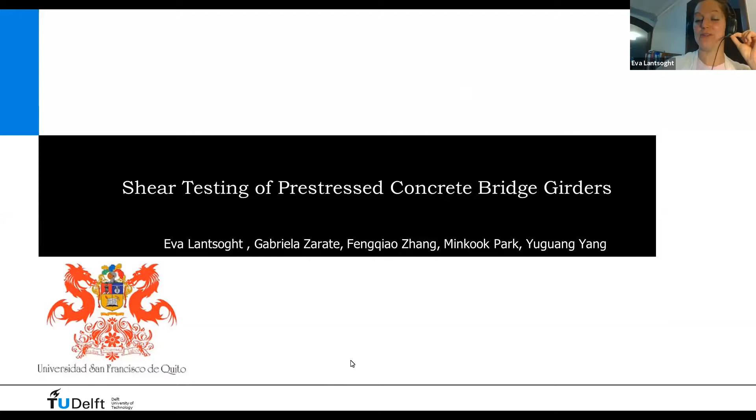Here's an outline of my presentation for today. I'll first give an introduction on this testing and the need for it. Then I'll give you some of the results of the experiments and recommendations for practice, and finally a summary and conclusions.

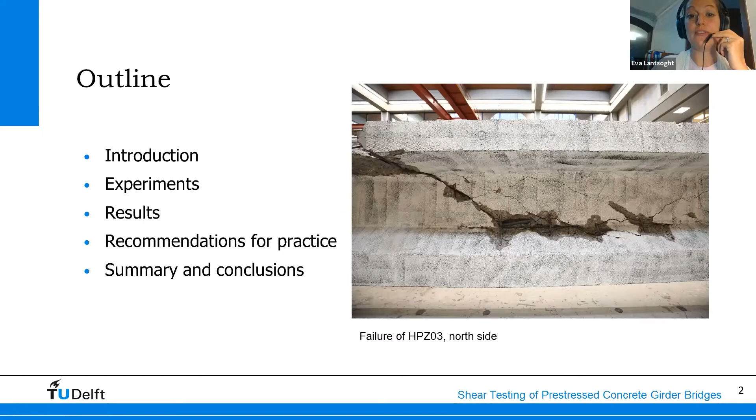The reason we are interested in testing these types of girders is that we are working on the assessment of pre-stressed concrete girder bridges. There are about 70 pre-stressed concrete girder bridges in the Netherlands. These are bridges that have thin slabs cast in between the girders, and the whole system is kept together with transverse pre-stressing. We call this a slab-between-girder bridge.

Most commonly it's the slab-on-girder bridge, where you have the girders and then the deck slab on top. This structural system is a slab between the top flanges of the girders. We also have a number of diaphragm beams that also make the system work together.

In the past, we focused assessment on the capacity of the slabs, because these are very thin slabs, and according to the first evaluations, we found that their punching capacity was insufficient. Previous research has shown that in these cases, compressive membrane action causes the capacity to be much larger than what we would find from the code equations, and that this mechanism does not break down under fatigue testing. So we could conclude after a lot of testing that the slabs are not the governing members.

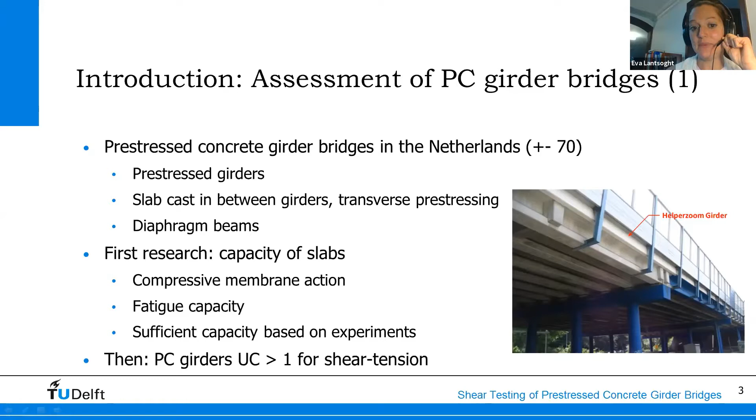What is governing for assessment now are the pre-stressed concrete girders, which have a unity check larger than 1 for shear tension, for the failure mode of shear tension. The unity check in the Netherlands is used instead of a rating factor. A unity check is load effects over capacity, so if it's larger than 1, it does not fulfill the code requirements.

Here you see one of these slab-between-girder bridges under construction in 1965.

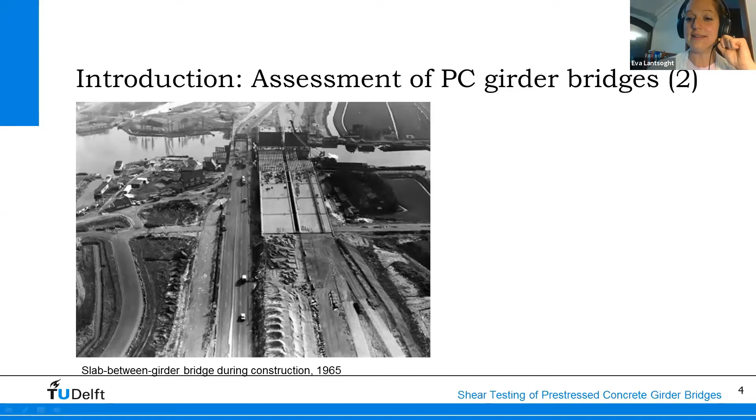I mentioned that in Delft we've done a fair amount of research on the capacity of the decks. Here you see the test setup that was used to test the punching capacity of the decks. That was the PhD research of Sana Amir. You have the reference here on the bottom.

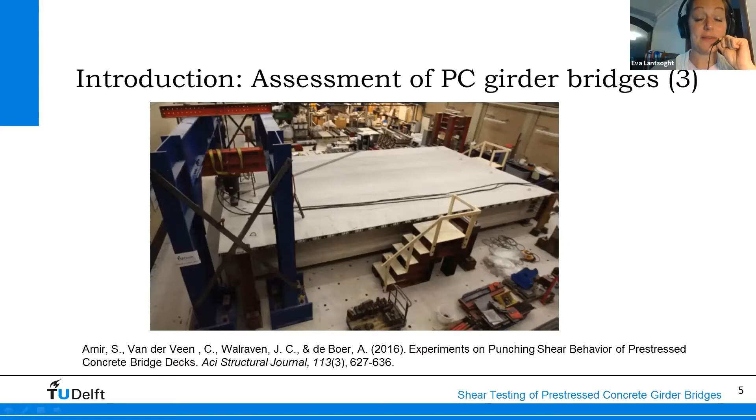As I said, now upon assessment, we find that it is the pre-stressed girders that are governing for shear tension. So let me introduce you to the specimens that we tested. These specimens are taken from a demolished slab-between-girder bridge, the Helperzoom bridge. This bridge had to be demolished because of the redesign of the perimeter around the city of Groningen.

Since these are actual bridge girders, they have all the details that real girders have, which not all typical laboratory specimens have, such as the parabolic tendon profile, with some of the tendons even anchored in the top flange. All the way at the end here, we have the anchor part, and then a part where the width of the cross-section tapers towards where we start to have the thin web.

We tested the full girders, but they were sawn in the field in half so that we would be able to handle them in the lab. The actual length of the girders in the field is about 25 meters. They were sawn in half, so we ended up with specimens between 10.51 and 12.88 meters in length. The overall cross-sectional height of the girder is 1.11 meters.

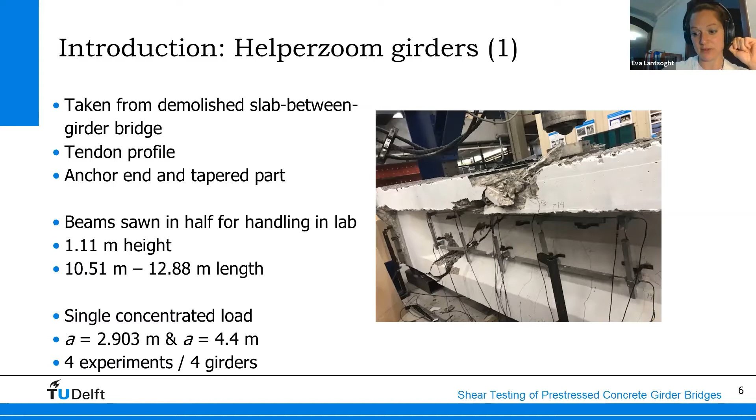We tested 4 of these specimens at two different positions of the concentrated load: at 2.9 meters from the support and at 4.4 meters from the support. So that's 4 experiments on 4 different girders. Here you can see the 4 girders that were taken from the bridge.

This is a cross section of the slab-between-girder bridge. You see how the slab is indeed cast between the top flanges of the girder. And here you see the tendon profile.

As I mentioned, this is a special detail: tendons 1, 2, and 3 are anchored in the top flange, so that's quite a special tendon layout. You see here all the other tendons and their position. You also see that there is very low stirrup reinforcement, a diameter of 10 millimeters at 400 millimeters on center.

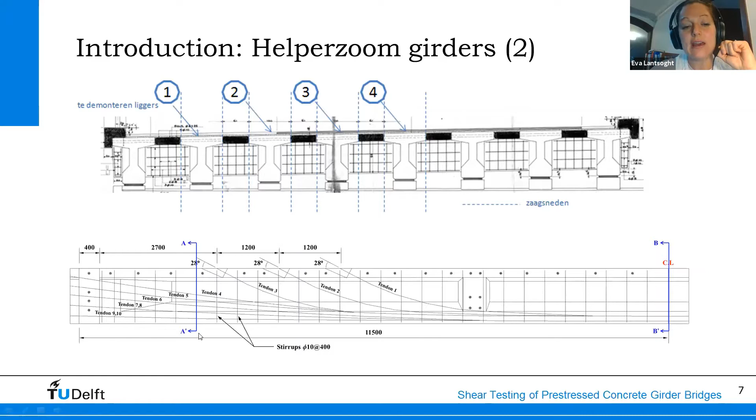Let's have a look at 2 of the cross sections, AA closer to the support and BB at the center line. At BB, as expected already from the previous drawing, we have all the tendons in the bottom flange. Whereas in AA, we have the position of the tendons here based on the tendon profile.

Now, the goal of this research was to look at the shear tension capacity of these girders, and really to evaluate whether shear tension is the governing failure mode in these girders, and to use these experiments to compare to nonlinear finite element analyses.

Especially nonlinear models developed with the Dutch guidelines for assessment using nonlinear finite element models. We have in the Netherlands a guideline for using nonlinear models, but these have been developed for slabs, reinforced concrete beams, as well as pre-stressed concrete girders. Of course, these special girders present a case that has not been used for validation yet.

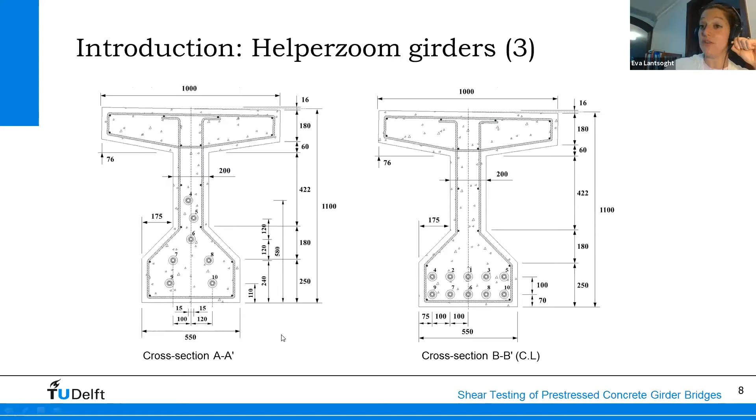And if I go back one slide, you can see the shape of the stirrup follows the shape of the cross section. That's not allowed nowadays anymore, because we think that under loading, the angle of the stirrup will try to open, and that this part is going to fall off. So we also wanted to evaluate if that's really a failure mode that happens, or if these non-code-compliant stirrups still function in carrying load.

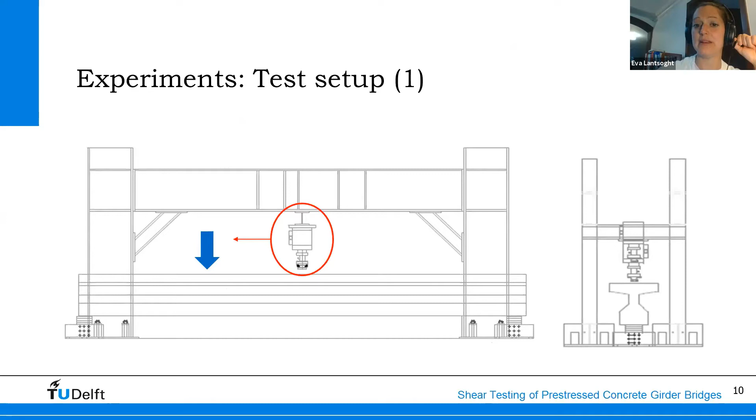So here is our test setup. What you can see is the girder and the frame and the jack that we used, side view and front view. And this is a photograph of it.

So we've used a large frame, the frame that we use in the Stevin II laboratory for all large-scale testing, with the 2000 kilonewton jack, and for the last experiment we used our 5000 kilonewton jack.

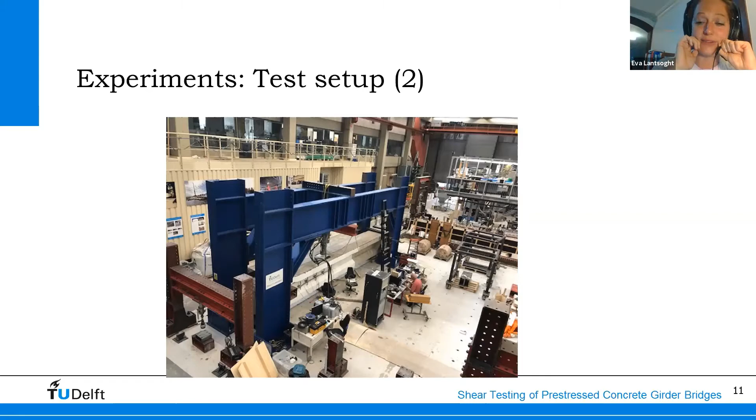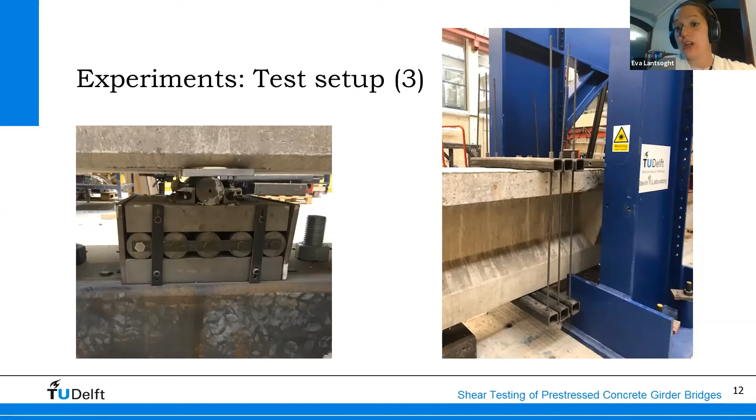Some details of the test support. Here you see the detail of the support, and since the specimens were sawn, we wanted to avoid the pre-stressing tendons pulling in and causing a splitting failure on the sawn edge. So we provided vertical pre-stressing, using Dywidag pre-stressing bars, to apply an axial load on the cross section to avoid that failure on that side.

In terms of instrumentation, we applied a regular set of LVDT measurements to find our strains in a grid on the side. We applied laser distance finders to find the deflections. We used acoustic emission sensors to study the wave-based properties. We also applied smart aggregates, casting them into the specimen. And we took photographs to do an analysis using digital image correlation.

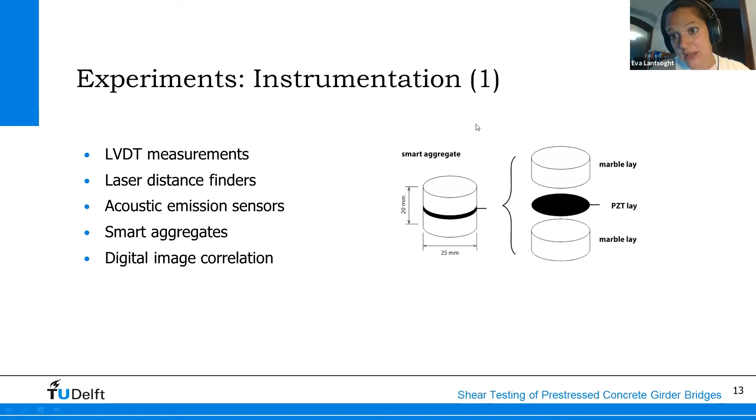So here you see an example of a smart aggregate. It's essentially a piezoelectric layer between two marble layers.

Here is the sensor plan for one of the experiments. It varied a little bit among the experiments, but this gives you an idea. We have the grid of LVDTs to find the strains and deformations, the positions of the acoustic emission measurements, 15 in total, and the laser distance finders under the position of the load. On the other side of the specimen, not shown here, we have the speckle pattern, and we take photographs to do the digital image correlation.

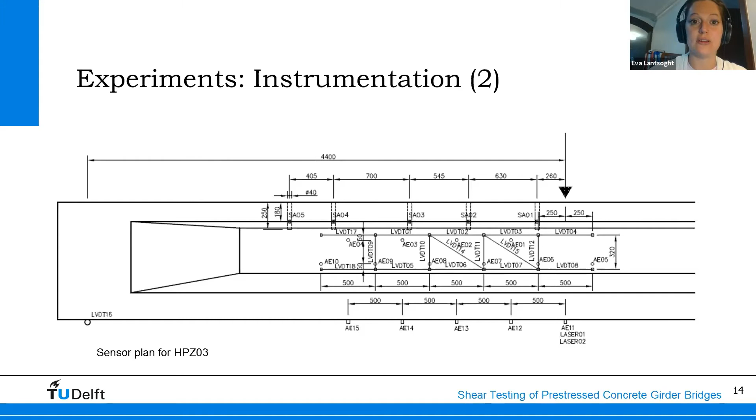We've done material testing to find the stress-strain relationships of the pre-stressing steel and the mild steel, and we did core testing to find the concrete compressive strength. So we know that we are dealing with a European concrete class C55/67, that's a 55 megapascal characteristic strength when testing on cylinders, and 67 characteristic compressive strength when testing on cubes.

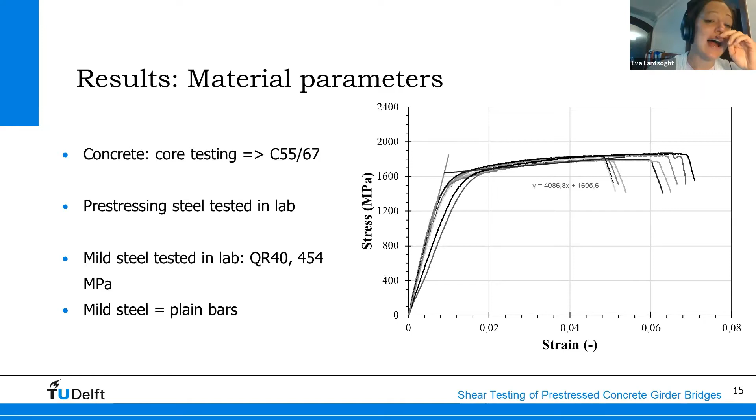We tested the pre-stressing steel. Here you can see the results of testing the pre-stressing steel coupons to find the stress-strain diagram. We also tested the mild steel, which were plain bars, and found it had an average yield strength of 454 megapascal, so we could identify it as shown on the drawings to be an old Dutch QR40, a mild steel with a characteristic design yield strength of 400 megapascal. We found an average yield strength of 454 megapascal, a little higher than we expected; we expected 440.

We also wanted to have an idea of the pre-stressing level in the girder after all the losses, and we looked at a number of methods. First, we looked at the traditional method using just a cracking moment. Then we looked at a more advanced analysis using a full sectional analysis, both using a layered sectional model that Min Cook programmed, as well as validating this model with Response 2000.

We also tried to measure this by first drilling cores and seeing what would be the strain release in the concrete. We did that by measuring with an LVDT as well as with digital image correlation. We also did the destructive method of cutting through the tendon and just measuring the difference in strain as the tendon is released.

For the third girder, with cutting of the wire, we had quite some difference in the results. We cut 4 wires, and the results ranged between 66% and 121%.

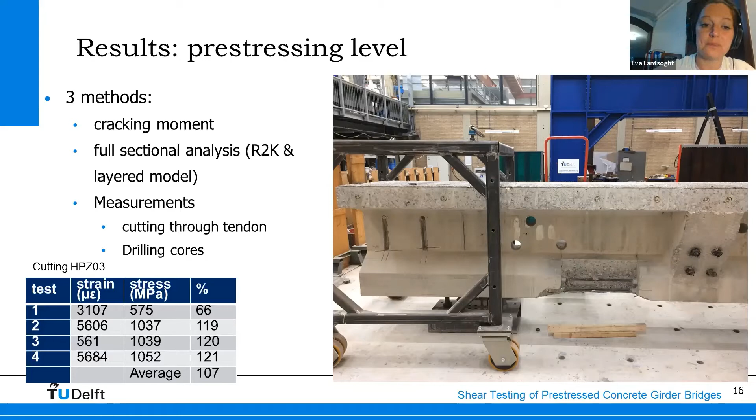In terms of loading, we used a loading protocol with loading to different levels and unloading, so that we could follow the opening and closing of cracks, and we could use this for determining the wave-based properties.

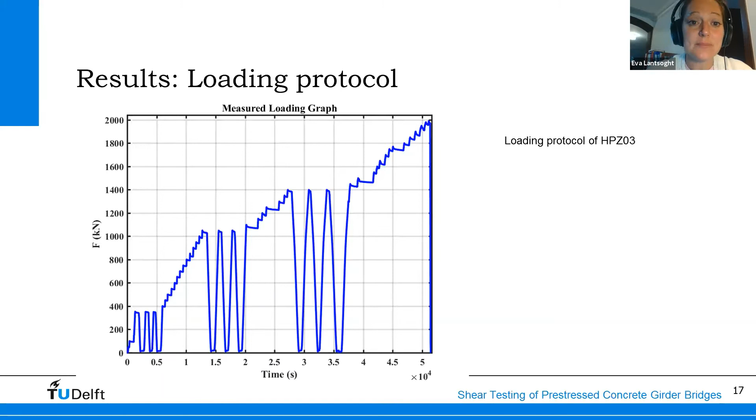Here's an overview of the results of the 4 experiments. You can see that they've been tested between June 2019 and December 2019, with the properties of the geometry. The A over D distances are outside of the region where we typically consider a direct compressive strut to develop between the load and the support, but our results have shown that there was development of a compressive strut even at the larger A over D distances.

Here you can find the values of the externally applied load for which we had the first flexural crack (F cracking), the first shear crack (F shear crack), the first shear tension crack in the web (F shear tension crack), and then the maximum load (F maximum), along with the associated deflection.

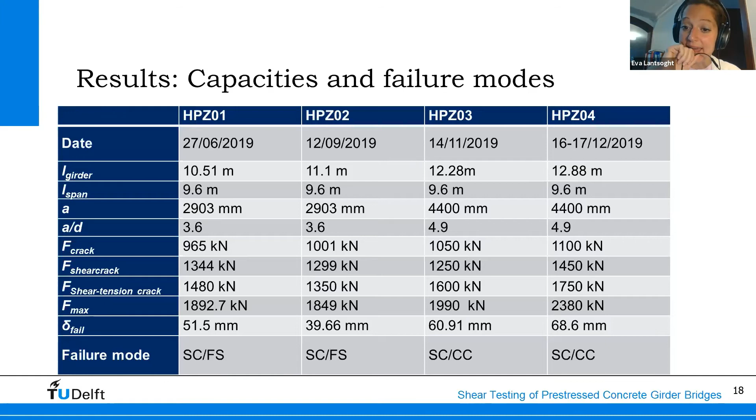The failure modes we observed were a combination of shear compression failure with opening of a flexural shear crack in the first two experiments. In the third experiment, we saw local crushing of the concrete in the top flange, as well as shear compression failure. In the last experiment, we had crushing of the compression field.

Here's the recording of the last experiment. You can see that here we are using a larger jack, since in HPZ03 we had a maximum load that was very close to the 2000 kilonewton capacity. In this case, we used the 5000 kilonewton jack.

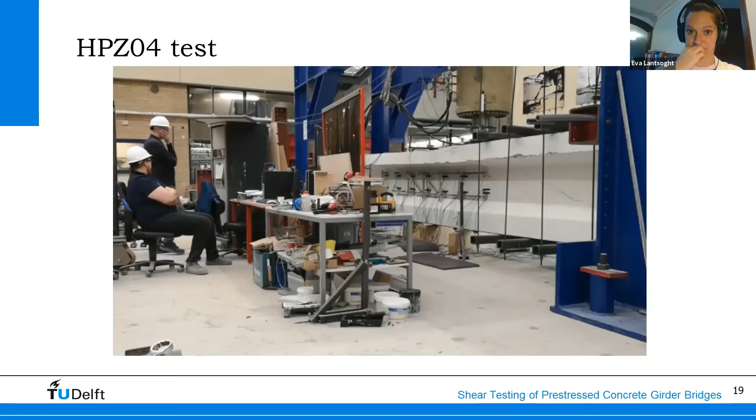So as you can see, a brittle shear failure.

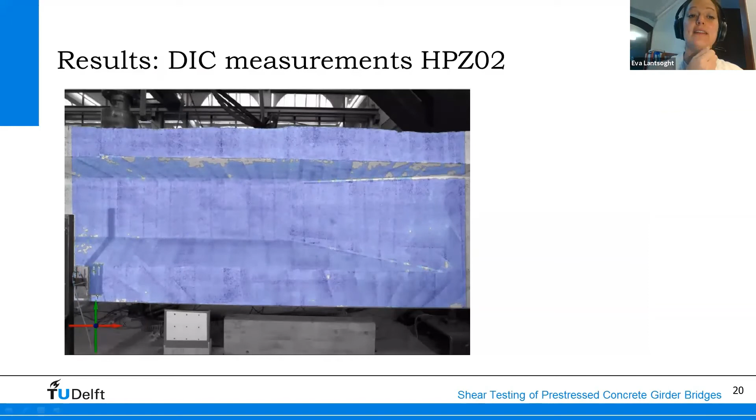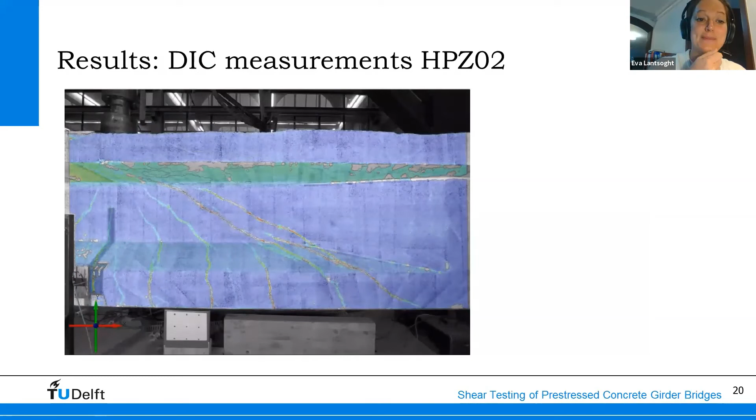Here's a video of some of the post-processing that we did based on the photographs, which we then processed with digital image correlation. You can see how the cracks develop: first the flexure cracks, then the flexure shear crack, and then the development of the crack in the web along the shear tension crack, or the web shear crack.

Here are some further results of the digital image correlation, which Gabriela developed over the course of the experiments. Essentially we've been able to calculate the crack opening and sliding. Crack opening and sliding are important input parameters to be able to calculate the aggregate interlock on the crack, so with that we can estimate which part of the shear is carried by aggregate interlock.

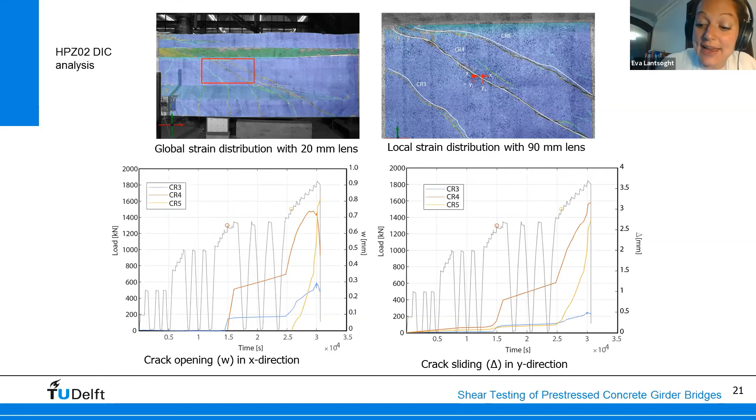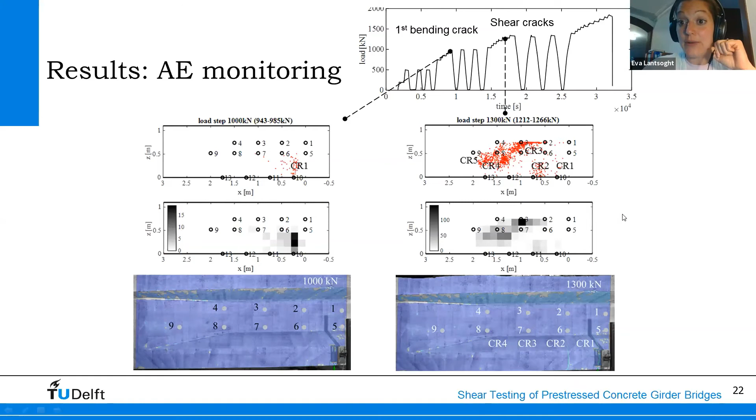When it comes to comparing our results to predicted capacity, we looked at inclined cracking load as well as ultimate load. Let's first look at the inclined cracking load for shear tension and the inclined cracking load for flexure shear cracking. We calculated the sectional shear with different methods at different cross sections and compared this to the sectional shear at which we observed that cracking. We have here the results using the Euler-Bernoulli method, the Eurocode formula, and V sub CW from the ACI. This is for experiment HPZ02.

This is for the flexure shear cracking, where we have the capacity according to the Dutch RBK, the method for assessment of existing bridges; the RBK method where we replace the stress from pre-stressing with the stress at the decompression moment; and the V sub CI from the ACI.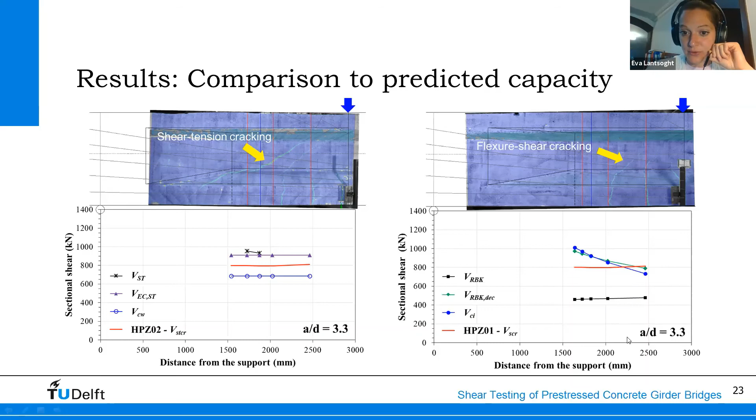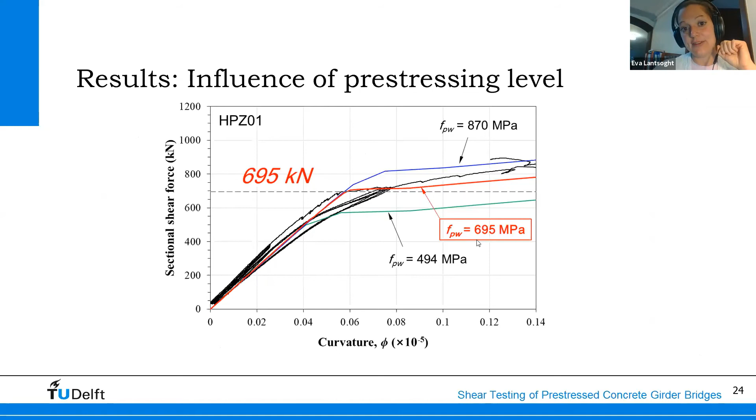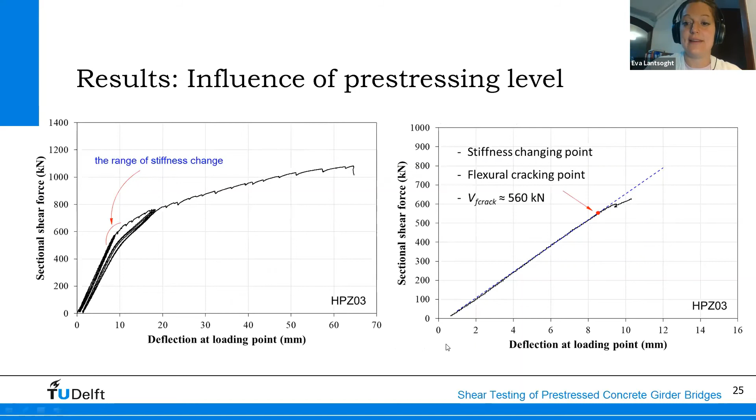One thing we studied further is the influence of the pre-stressing level. We looked at a detailed sectional analysis to fine-tune the pre-stressing level in the tendons based on the stiffness and the moment of cracking. That was not just based on sectional shear force versus deflection graphs, but also zooming in to see where the stiffness changes and what we can analyze from a sectional analysis there.

If we compare our results, we can see the failure mode changes as we change the position of the load. In all cases, we first had shear cracking and then could further develop the strength. But for loads closer to the support, at A 2,903 millimeters, we had clear shear compression failures, whereas for loads further in the field, at A 4,400 millimeters, we had either local crushing in the concrete compression zone or crushing of the concrete compressive field.

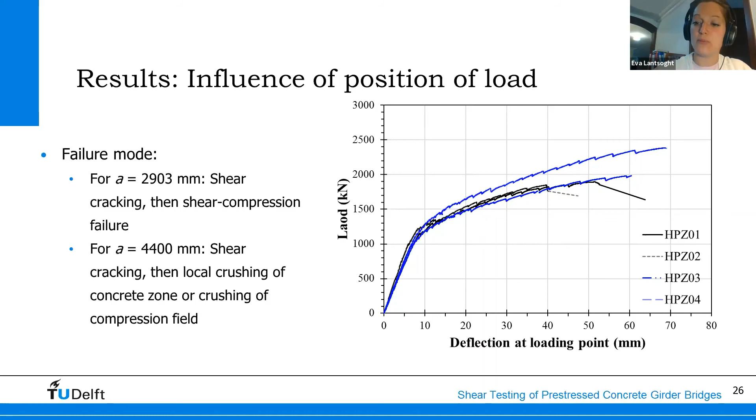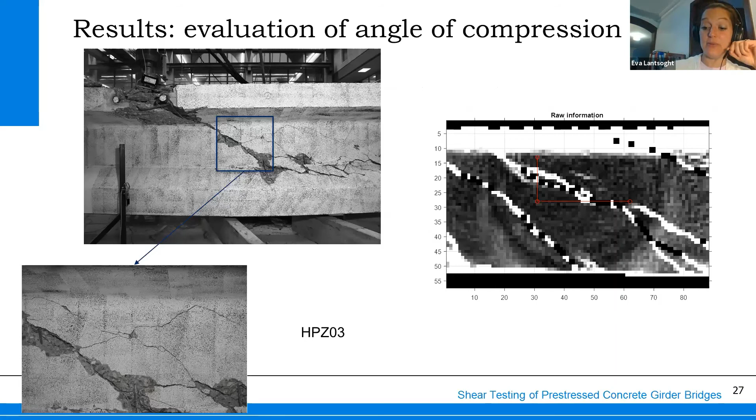One thing we've been able to analyze further with the digital image correlation analysis is the angle of the compression field. Here you see some of the analysis done, and on this graph you see the angle of the compression field as a function of time, with the loading graph for comparison—this is after all the cycles of loading, until failure. What we see is how the angle rotates downward. We start at 45 degrees and then it rotates downward and downward until we are at about 22 degrees.

We've also learned from our measurements that acoustic emission measurements can capture cracking early, before any of the other methods. We can gain insight into the shear carrying mechanisms by using digital image correlation, and in particular the analysis with aggregate interlock.

We've been able to confirm how the compression field rotates further downward. We also learned that if we want to measure the displacement under the load, we need a sufficient range with the laser distance finders.

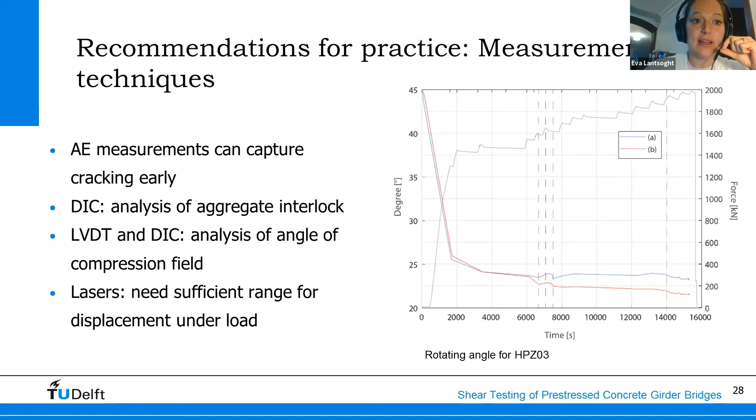Now, if we want to apply this to load testing of pre-stressed concrete girder bridges, this is a topic that is still ongoing research. We've done a collapse test on a bridge of this type in 2016, and we are planning to relate the insights from our lab research to collapse testing.

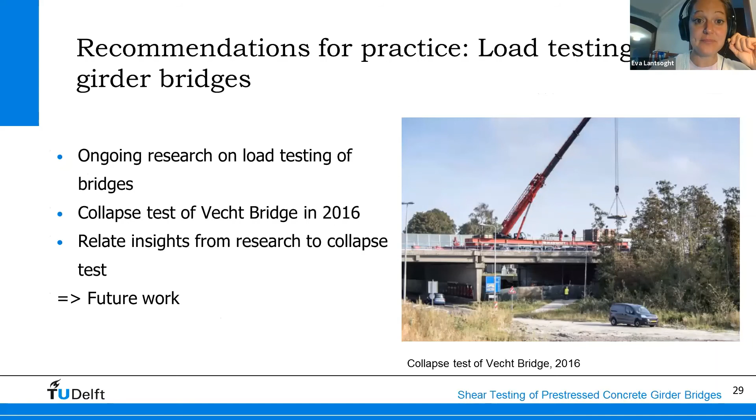With regard to some recommendations for practice, we found that for the assessment, there are a few other topics that need to be addressed if we really look at slab-between-girder bridges, namely system behavior and transverse load distribution. These topics are being studied by Sebastiaan Ensink, one of our PhD students.

We also found that, as I said, in the Netherlands there's the Dutch guideline for nonlinear finite element analysis, the RTD 1016 from 2017, which, if you follow it, gives good predictions of the experiments, so that could be used for assessments.

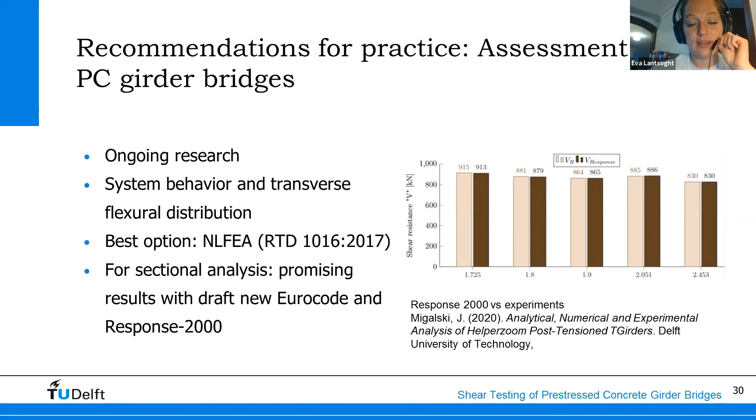One of our master students looked at the draft new Eurocode and found promising results when using the draft new Eurocode as well as Response 2000.

We are at the very end of analyzing the test results. We still need to work on outlining an assessment method for these types of girders, and we want to use the insights from the different monitoring techniques for short-term field testing, load testing, as well as long-term monitoring.

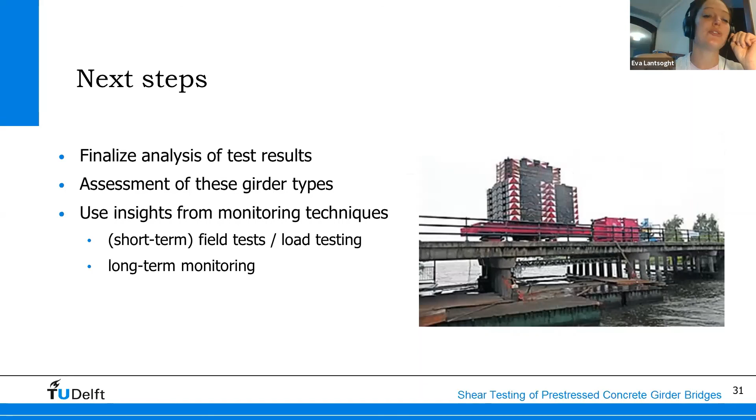To summarize and conclude, we carried out four experiments on pre-stressed concrete girders failing in shear. All failure modes were related to concrete crushing, either shear compression failure—losing the compressive capacity in the strut—or local crushing in the compression zone, or crushing in the compression field. We saw that we could increase the shear capacity past the inclined cracking load, which indicates that the non-code-compliant stirrups can carry load and function as regular stirrups.

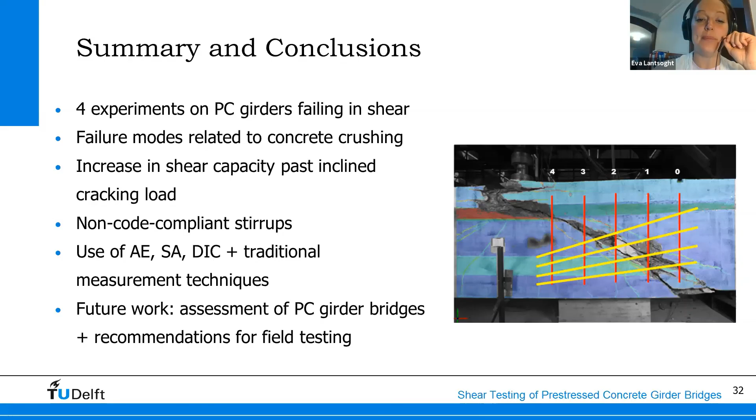We looked at a number of monitoring techniques, including acoustic emissions, smart aggregates, and digital image correlation, in combination with traditional measurement techniques like LVDTs and laser distance finders. As future work, we have the assessment of pre-stressed concrete girder bridges, using these insights to develop recommendations for field testing of PC girder bridges. That concludes my presentation for today.